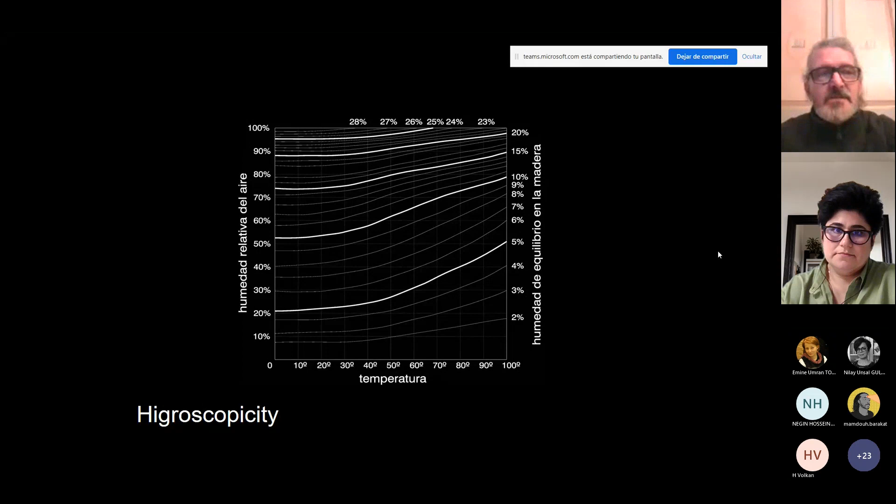So we need to know that wood is a material which is different to others in a series of concepts, such as hygroscopicity, which is the property of wood of getting moisture from the air around, or the contrary, giving that moisture to the air around, depending on the humidity and the temperature of the place in which that wood is. So it doesn't behave as metal, it doesn't behave as concrete, it doesn't behave as stone. It has its own properties.

Another one is anisotropy. Its properties are different in the three axes in which we can organize any cut of the wood: longitudinal, radial, and tangential. That's the reason why when it shrinks, because it's getting dry, it cracks. And it always cracks in radial direction because the tension is double in tangential than in radial. That's one of the consequences of its anisotropy.

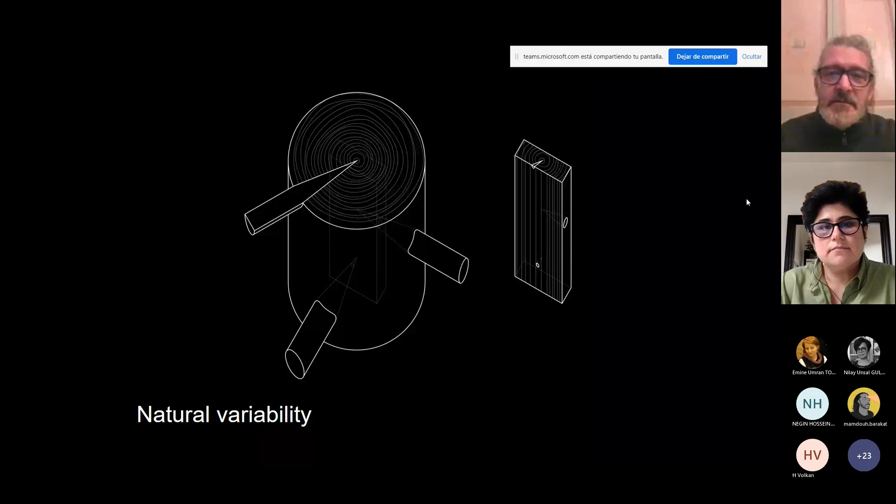Another one is natural variability, and natural variability is due to many things. One of them is the species of wood. There are thousands of commercial species of wood, and each one has different properties. So the anisotropy is different, the shrinkage coefficient is different in each species. But also, where you see those horizontal elements which have been drawn here, those are branches. Branches mean discontinuity of wood.

So if we take a plank out of this trunk, we see it on the right side, you can see that we cut those branches, which are always radial, and they involve a discontinuity in the grain of wood. So they reduce the structural properties of that element. The bigger the knot is, the lesser the structural properties of this wood are.

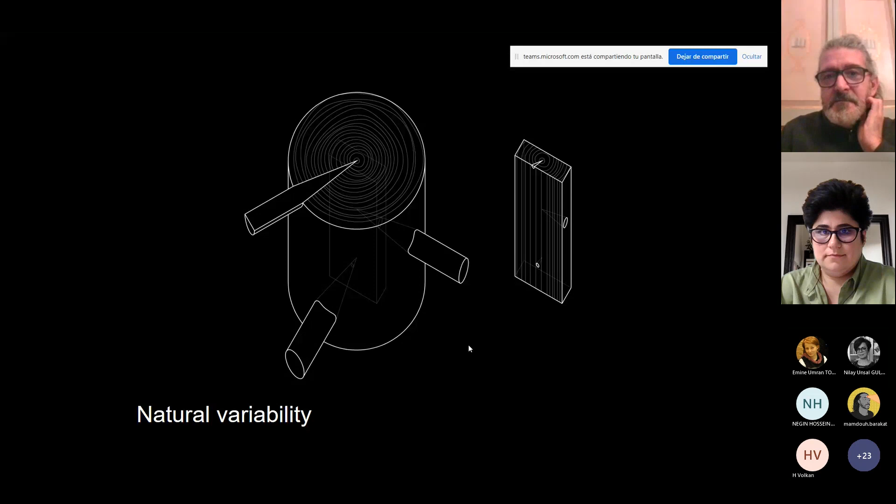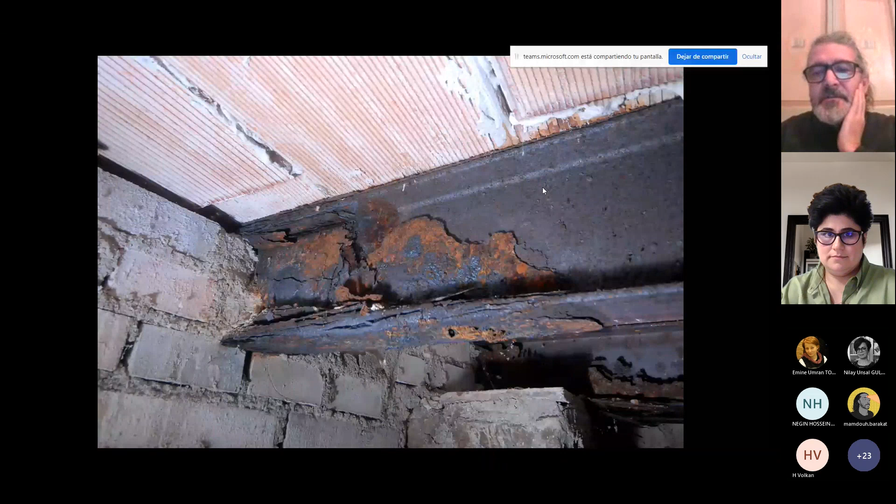So yes, there's an issue with durability, but to say that wood is not durable is not as simple as that. We can see a metallic beam which is on the way of being destroyed by corrosion due to moisture also. So moisture is an issue also for metal, and you can get to this extreme where the metallic beams, in 100 years of use, have been completely destroyed because of moisture.

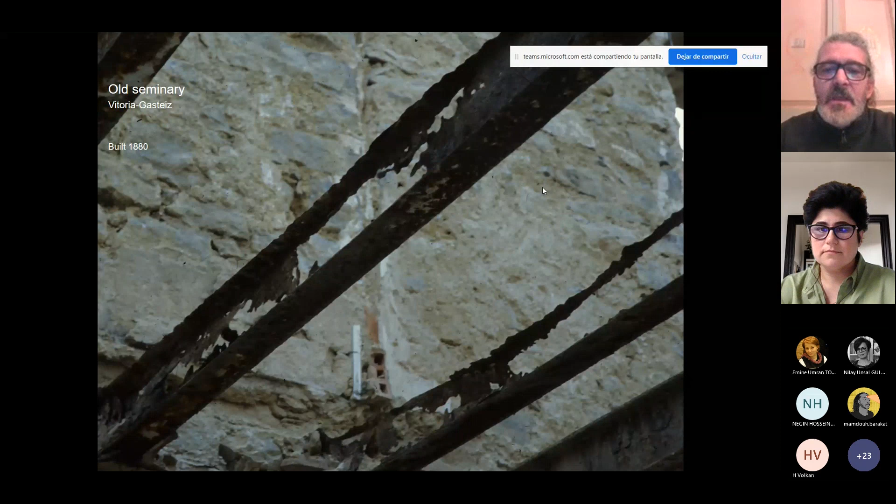Which is why, for instance, the French need to do constant maintenance of the Tour Eiffel in Paris, because if not, it would have the problems we've seen in the former images. So it needs maintenance, and they do it, and that's why the Tour Eiffel is still there and will still be there for many, many years.

This is a restoration work we did in 2016 very close to Bilbao, on the coast, in a very industrial, coastal and exposed situation, in which the owner, an industrial man with a lot of money, probably told the carpenter, put me the best wood you can here. And it was teak.

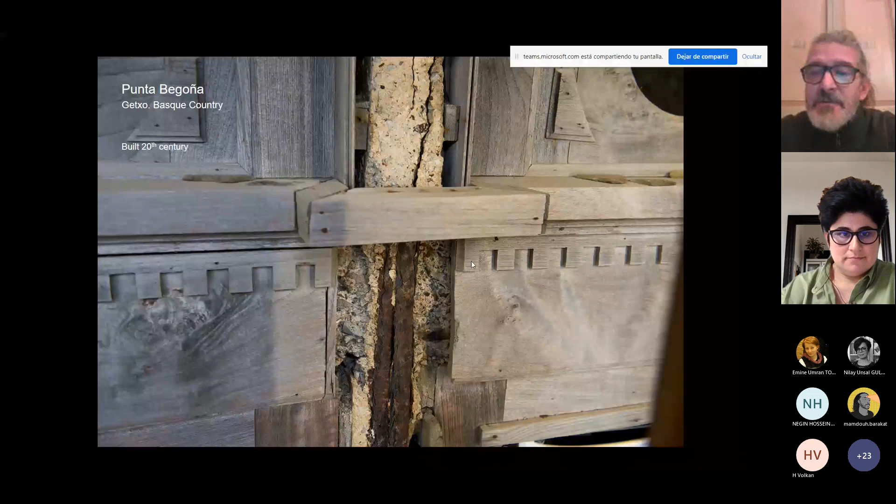But we also know that there are buildings such as the Urnes Stavkirke in Norway that was built in the 12th century and still standing. Obviously, they maintain it. They care for the building. They've been caring for the building for so long. So that's the reason why it's still standing. So durability is linked to maintenance and to the care of the people that are managing, using the building.

And the case of the Horyuji in Japan, which is a 5-story pagoda in the old capital of Japan, which was Nara. It was built in 670, which is, well, a long while ago, and it's still standing. This building and the former one in Urnes are World Heritage, both of them.

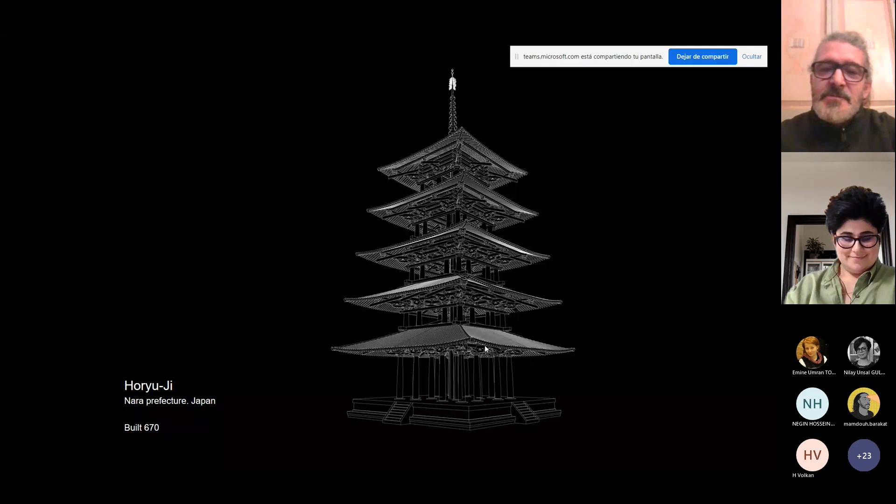Impregnability. This is a very relevant property of wood when speaking of heritage, because from time to time we need to protect wood, and we protect it with chemicals, and those chemicals need to get into the wood. So if the wood is not impregnable, you cannot protect it with chemicals. If it's impregnable, then you can protect it. This concept of impregnability is very related with durability.

If you have, as the image we saw before, the teak, which is a very durable wood, it doesn't matter whether it's impregnable or not, because you won't treat it. It makes no sense treating it. But if you have pine, some kind of pine, then you need it to be impregnable so that you can protect it if the use will be outside or in any place where moisture can access the piece of wood.

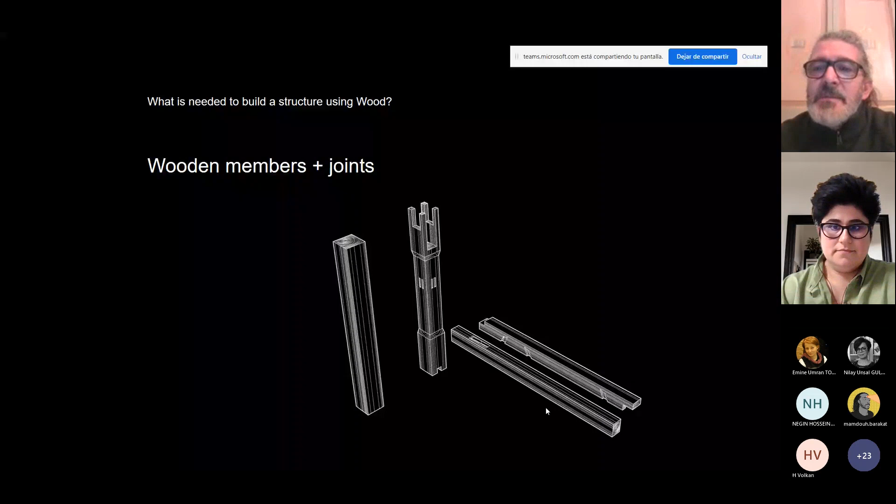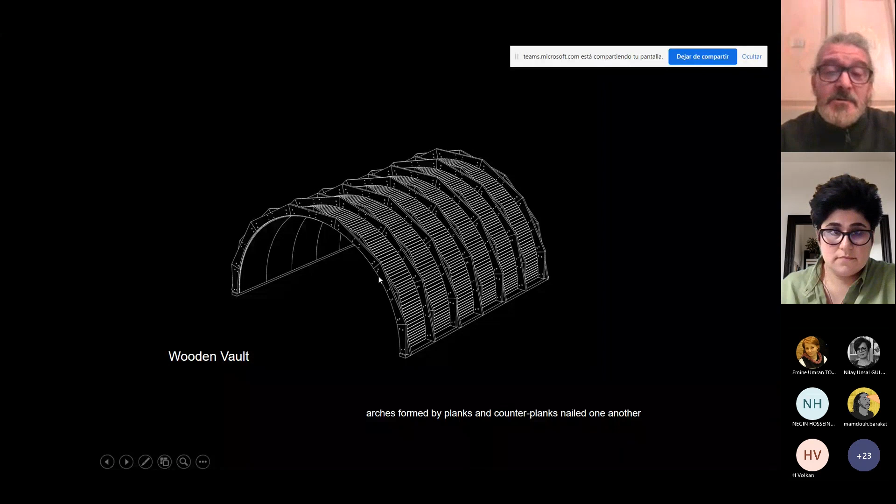And here you have more complex vaults made of planks and counter planks that are nailed to one another, and you can see the nails and the limits of the planks, because you always get a plank from a tree, and a tree is usually straight, so you cannot do the complete arc with a single element. You need different elements. So this double arch system that was used for centuries is quite an efficient and interesting one, and you can see it in the Cathedral of Lima and other buildings in Europe and in South America.

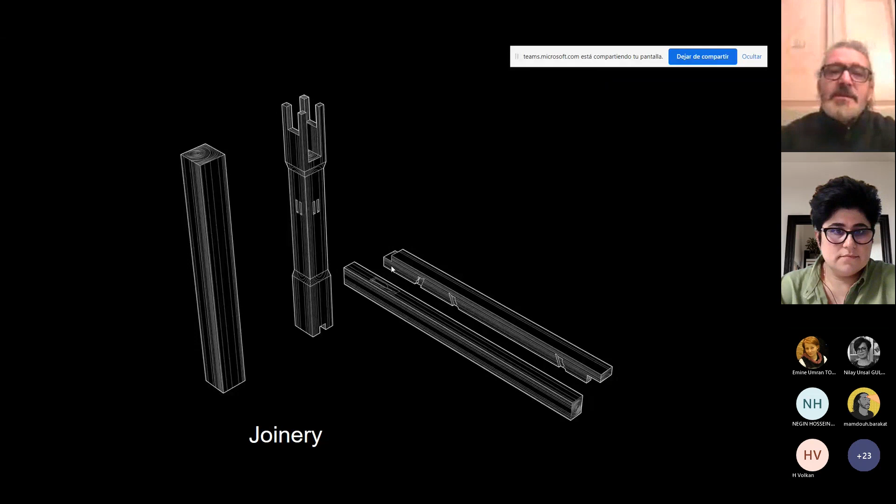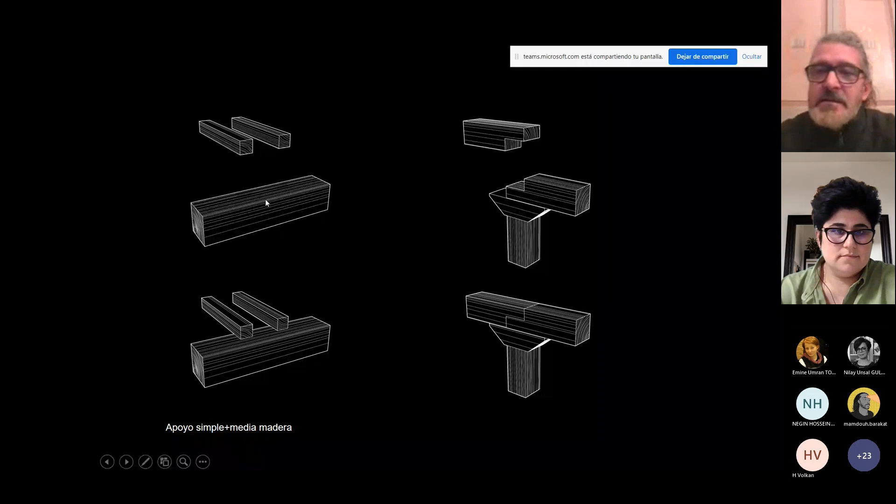Another way of joining is joinery, traditional joinery. That would be the third one. We've spoken about knots, about nails, and this is joinery. This is the most typical, or the most recognizable for wood, which can be as simple as a simple support with this joist just put on top of the beam, and that's it. It's as simple as that, or a half joint. But with those two joints, you can make this building, except the roof. All the rest is made with those simple ways of joining.

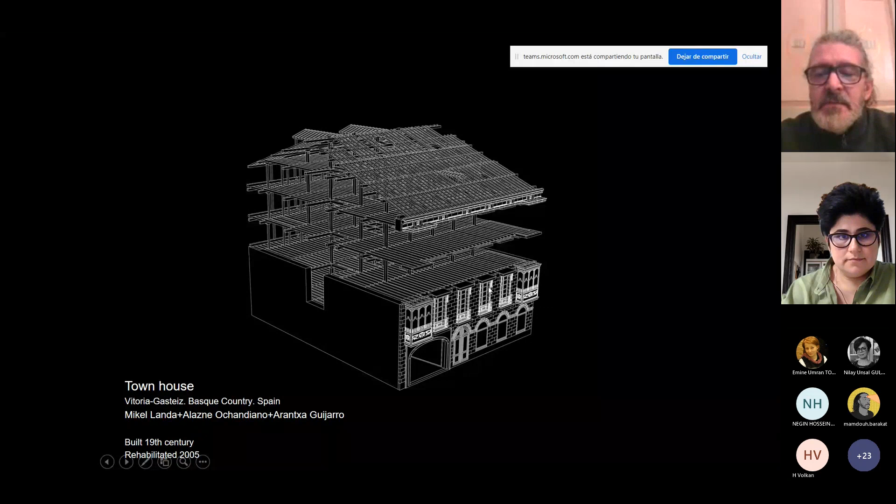This is a typical stone facade in the center of any Spanish city, but it can be also Italian or French or from so many places. And inside of it, everything's wooden: the pillars, the beams, the joists, and the roofs.

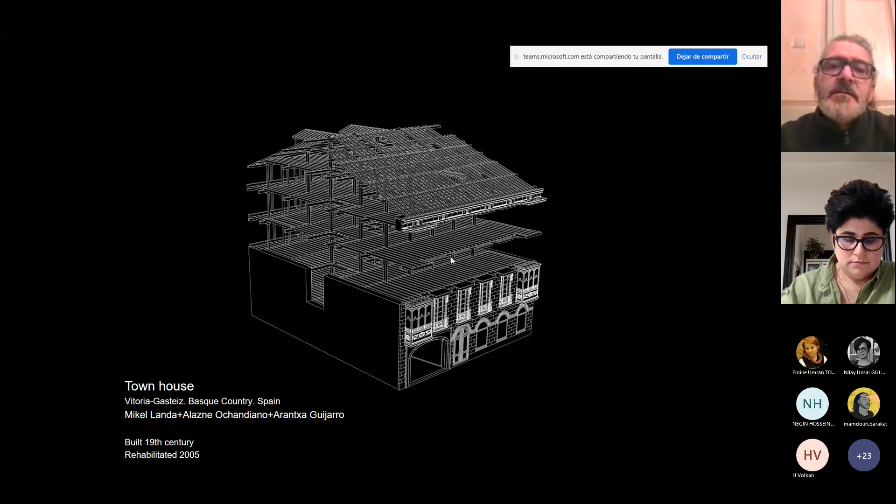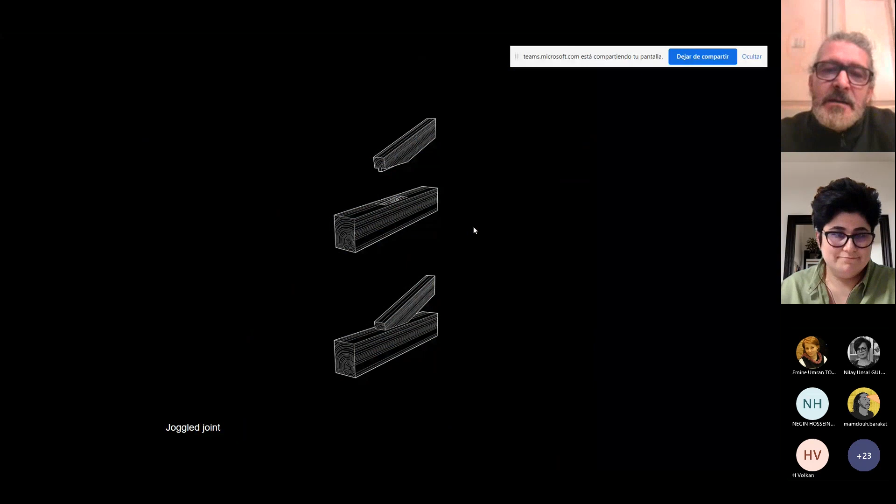Joggled joint. When you get an angle you can have a truss like this one, in which, when putting one and a few meters later the other, and then the other, you can make a roof. And a roof that works quite well because it only transmits vertical efforts to the walls, to the stone walls. So the structure is quite interesting.

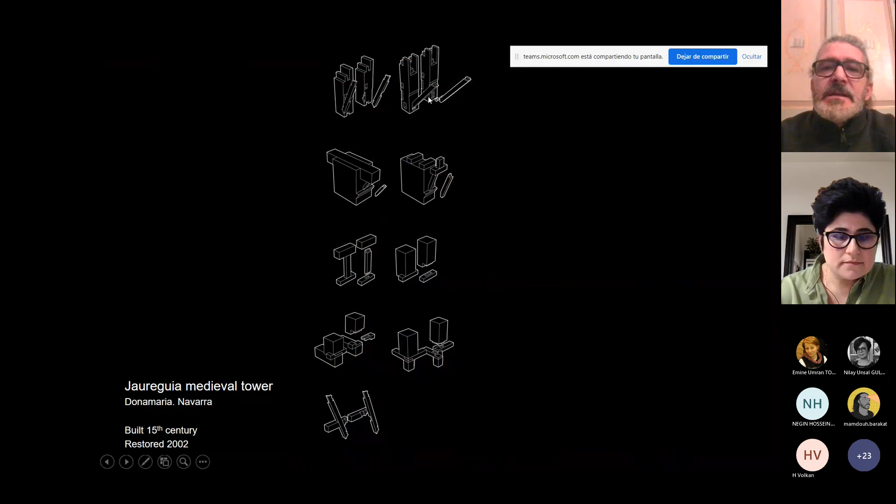This is a medieval tower in the north of Navarra, built in the 15th century, restored in 2002 by a teacher of mine in the university, Maite, and she did an extraordinary job in restoring this. But the building is an extraordinary example of how to use wooden joinery. What is each kind of joint for? And they've been used with a very precise idea of what they needed as a structural function for every element.

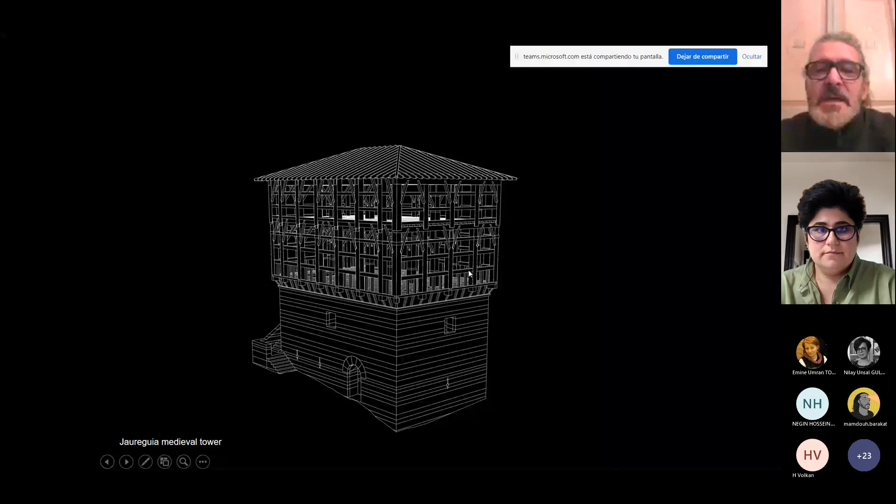So this is the structure, 2 stories made of stone with the inside made of wood, and the 2 upper stories are completely made of wood. And this is a consequence of a war which was lost, and then the winner, which was Spain, said, okay, you will cut all your towers, and the upper part will be made of wood. So the consequence of a war gives us, centuries after, an amazing heritage, and this is it, seen from outside.

This one is not that new because glulam, we've been using it for 100 years, but with small elements you make big beams, and then with those big beams you can do amazing structures that you obviously can't think of. Many of them you've seen or you've loved. LVL, laminated veneer lumber, which is a kind of very thin layered glulam, which is structurally more efficient and uses wood in a better way, or CLT, cross-laminated timber, with which you can do big constructions, and it's used for many purposes today. It's very popular, at least in Spain, but in many other countries also.

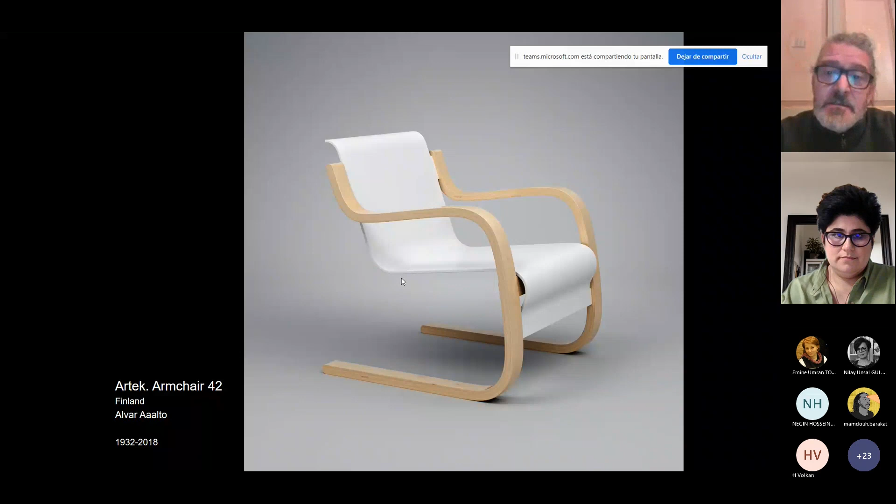But imagine, you all know this chair that Alvar Aalto did, not 100, but 90 years ago, which is quite a lot. And it also was quite innovative at the time, but it's the properties of wood with glue that make this chair possible. And that's it. And I would say it's comfortable.

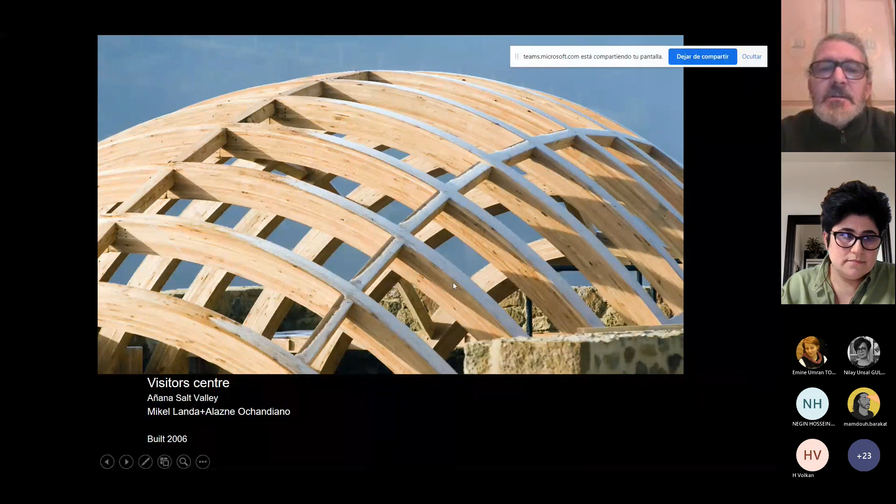But it also gives us the opportunity, together with those CNC milling machines, to do amazing structures like this one. We did that a few years ago in Añana, in the Salt Valley of Añana, and it's an ellipsoid made of glulam, and this is the shape of it.

So it gives so many possibilities in new construction, but also when speaking about conservation. What we're doing today, the techniques, the way of focusing how to work with wood, is specific to the material, specific to the culture, specific to the building you have in front of you when you have to restore something. So wooden heritage gives the possibility of doing so many different buildings, so many different structures, that the heritage itself is very diverse, and the conservation processes are also diverse.

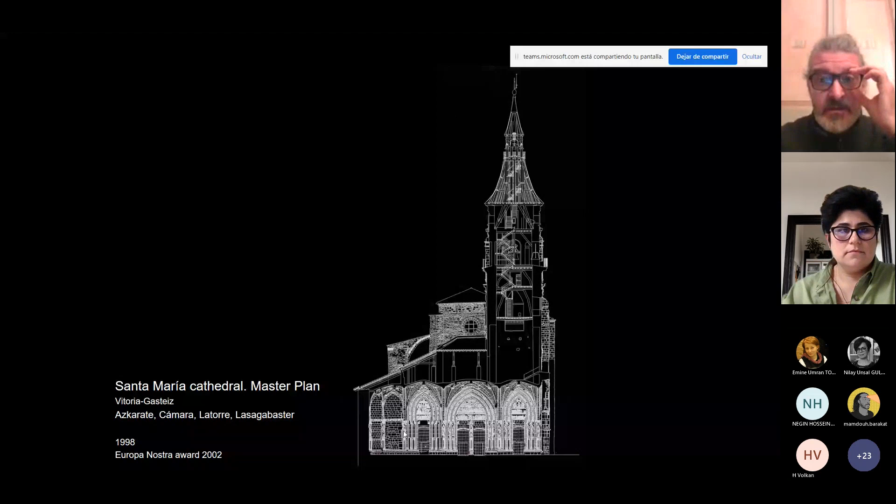So in this case, in 1998, the Cathedral of Vitoria, of Santa Maria, during the master plan, this was done with pairs of photographs, which is called photogrammetry, and then all the stones, woods, and corners of the building were drawn on computer with accuracy. It takes time, but depending on the building, it's worth it.

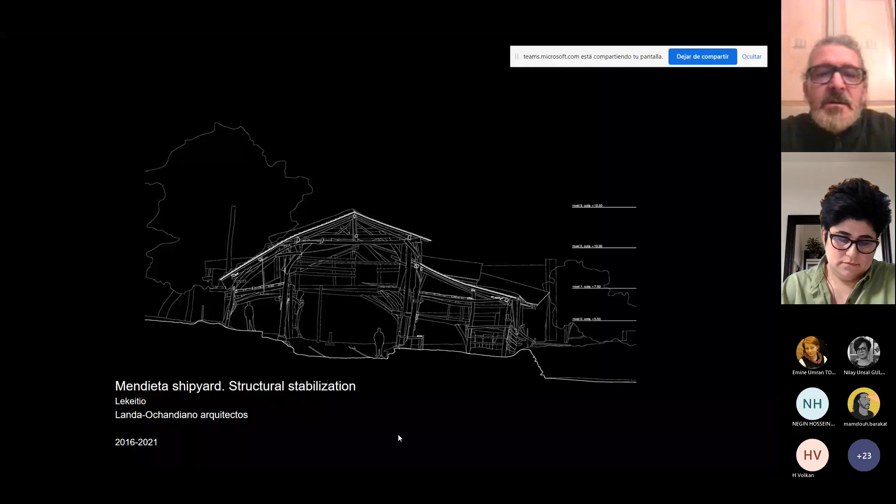But we used this for another amazing project we're actually doing located on the Basque Coast, which is a shipyard, and which is completely deformed in every direction. So you cannot, well, you can, yes, but it's difficult to do it in the traditional way. So what we did is a laser scan, and with a point cloud in the computer, then we draw it piece by piece, element by element, each one of them in the exact position, dimension, and in relation with the others it has in reality.

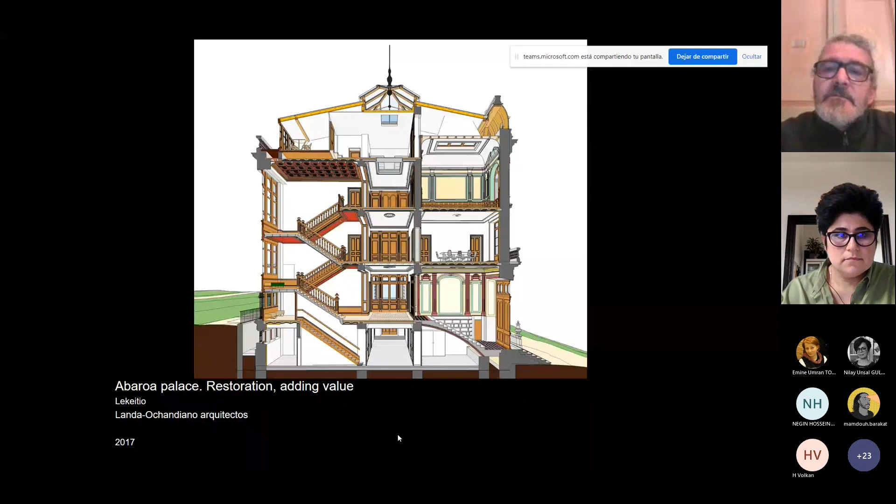But you can also use BIM, I mean Revit or any other kind of software that works in BIM, which is the one we use here for the Abaroa Palace, which is also on the Basque coast. This is it. This is a view from the outside of the building, and then with the proposal for new buildings, also made of wood.

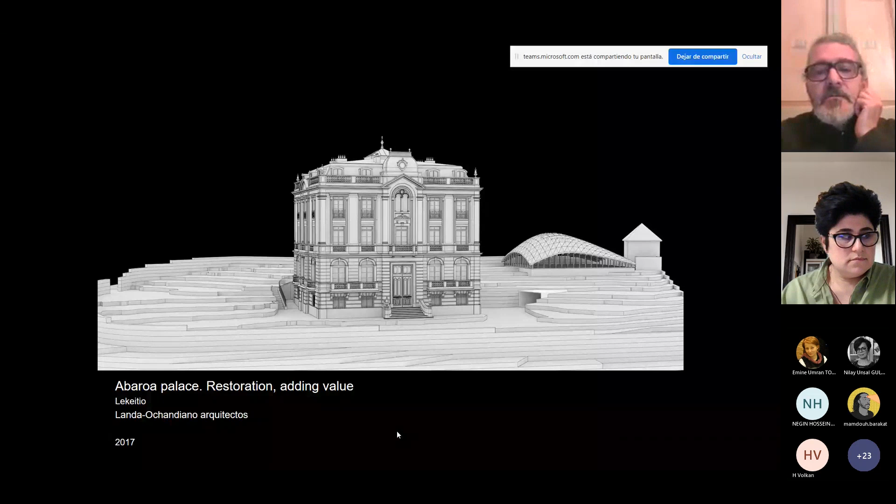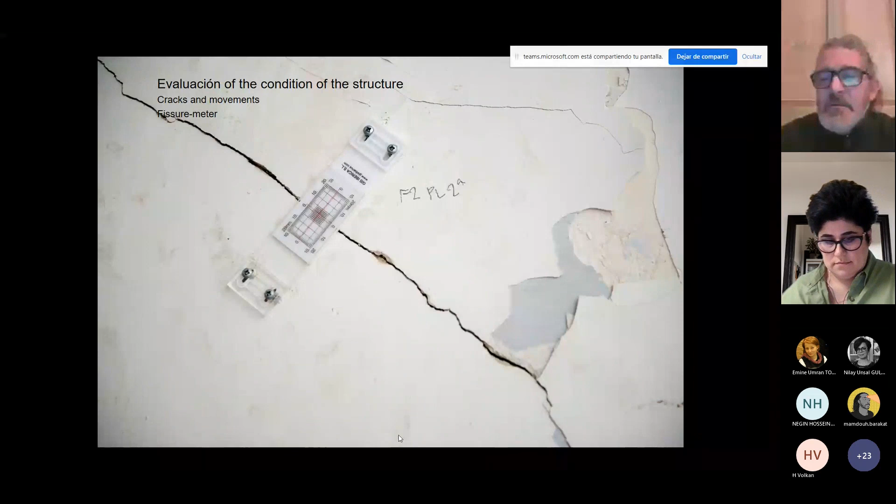Obviously, you need a diagnosis of what the condition of the wood in the building is, and for that you can track every data that is relevant for the wooden structure. It can be also the cracks, following how the cracks are evolving, whether they are evolving or not, and at which speed they are evolving, and in which parts of the building they are still, not moving, or in which of them they are moving. So that's quite relevant to know if the building is still sagging or leaning or whatever.

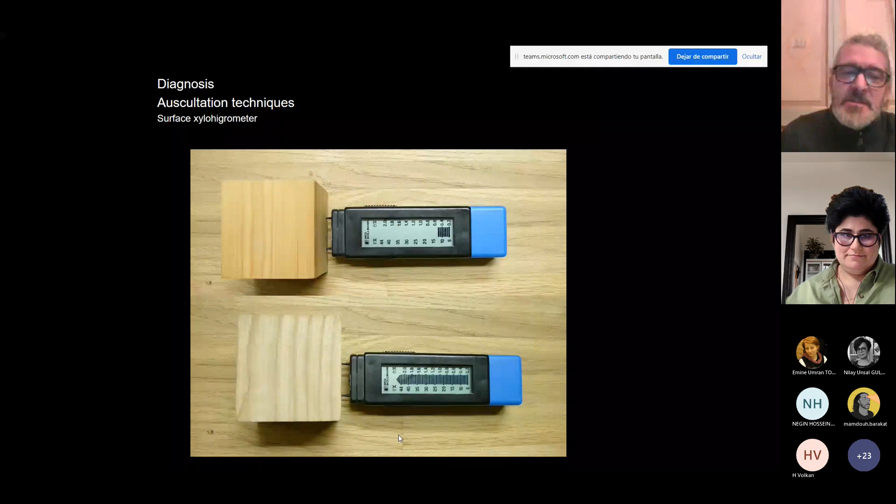Measuring the moisture content of wood to know whether the wood in the upper one is 12%, and in the lower one is more than 44%. Those are samples in the office, obviously, but if those were on site it would mean that the one on the upper side of the image is correct in terms of moisture, and the one below has a problem. And yeah, that gives information that can be relevant.

But also some, I would say, more modern auscultation techniques like the resistograph, which is like a drill. It's a very thin drill that gets into the wood, so it's not completely innocuous. It makes a very small hole in the wood, but sometimes you need that hole to realize whether there's an issue, whether there's a structural problem or not inside the wood.

It gives a lot of information, and all that information of any kind of method that you're using, any kind of different measurement you're doing, you can put it into a drawing and then display it in a way that it can be understood quickly as well.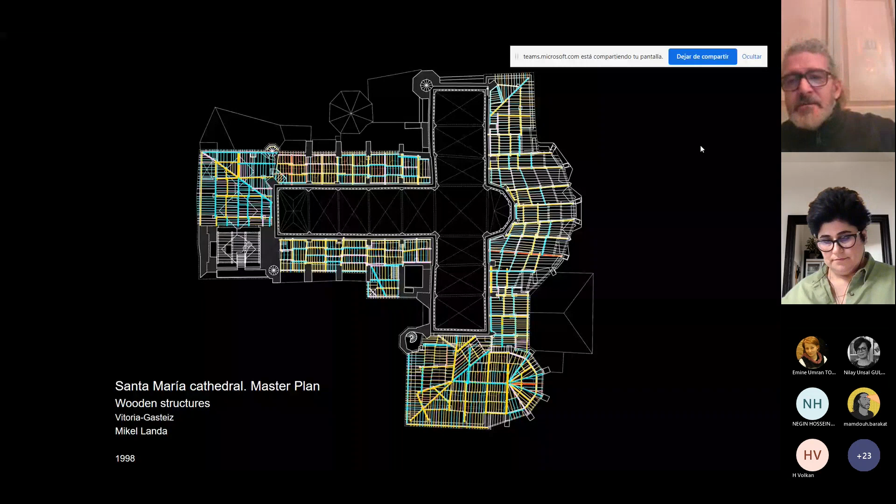And then you can go even further and give a kind of structural qualification, whether each one of the elements is still appropriate for structural use or not. And then after all that information, you can decide in a better way than without that information, and we go forward.

So techniques, there are many, but I usually like to concentrate on those that carpenters have been using for centuries. You know that a wooden structure is usually more isostatic; it's not like a concrete structure in which you have rigid joints. For having this upper left structure working, you need to put a diagonal on it so that it doesn't deform.

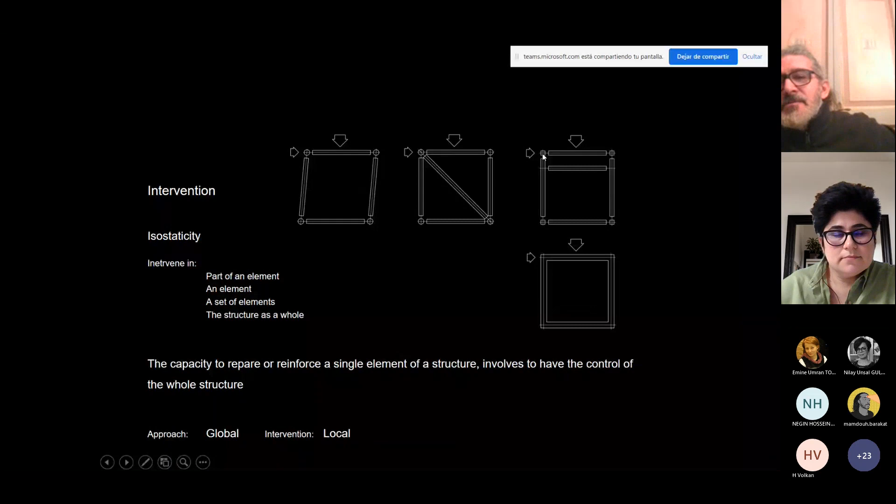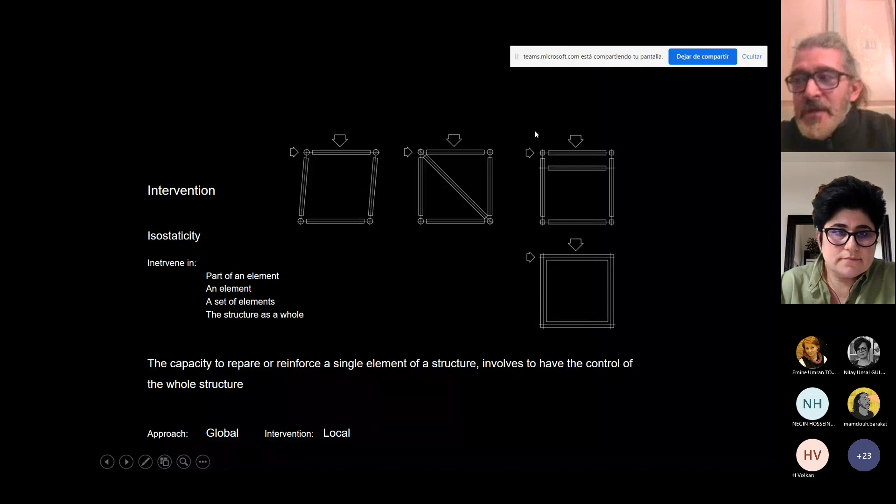The Japanese and the Asians, they do it by repetition of elements, vertical, horizontal elements with knots that are much more sophisticated than ours. That's why I drew them with a square instead of a circle. Some of those Japanese knots have a certain capacity of absorbing moments, flector moments. So if you repeat them in a certain number, then you have an approximately rigid structure, which is fantastic for earthquakes. They work well with earthquakes.

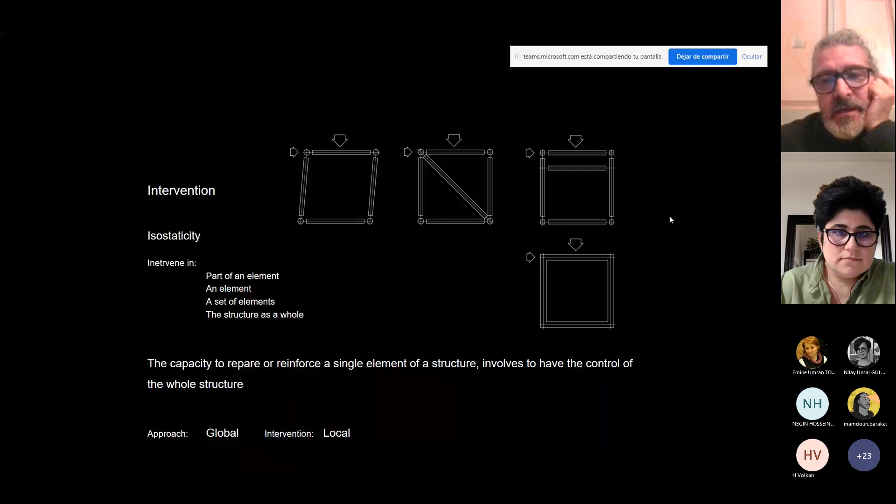But also, I go backwards to this one. The fact of being isostatic means that if you intervene in one part of an element or on an element, then you're able to control the whole building. If you are able to repair one single element, whether it is bending or compression or tension or whatever, then you're able to restore the whole building.

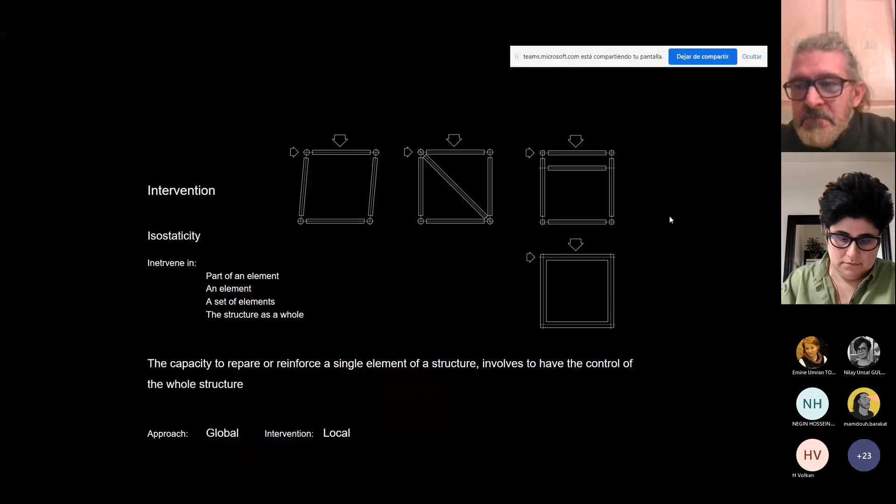So the approach is global, obviously, but the intervention can be local. You can restore, repair, reinforce, or whatever you have to do to one single element, and you're doing something which is appropriate for the building.

And this is the kind of repair that carpenters have been using for centuries in so many countries, which is a graft. We could call a graft a repair or reinforcement carried out in a wooden structural element by the only use of wood and joining both parts. When I say both parts, I mean the element you're repairing and the new one that you are giving for the repair. So joining both parts with joinery, fasteners, glue, or a combination of them.

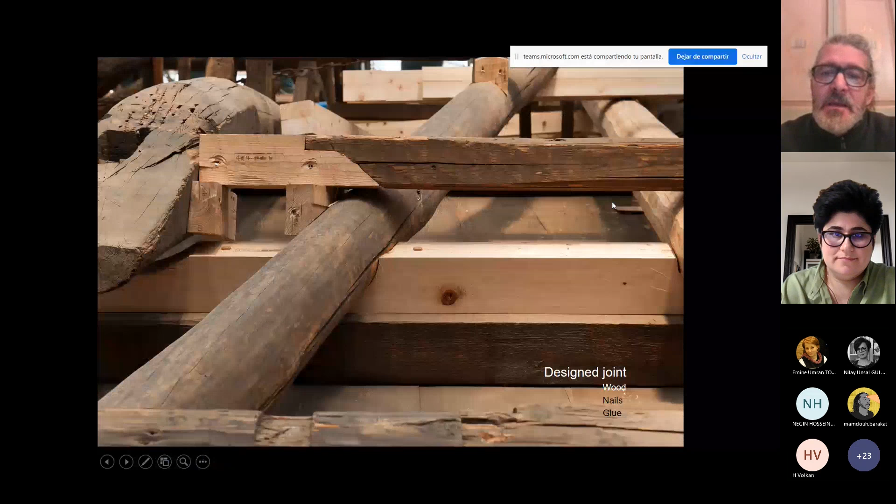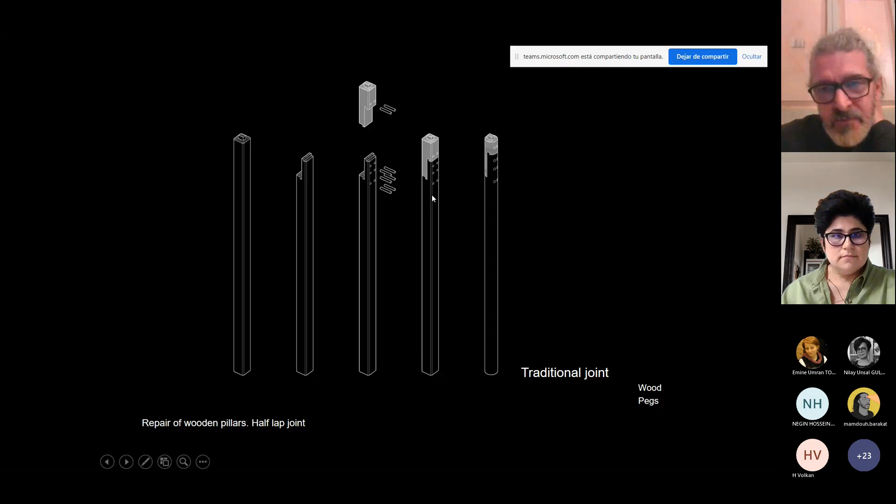Well, a graft in the top of a pillar which could have damage, and with a simple joint, then you can only replace a small part of the pillar, and then you have the pillar which is structurally efficient, as it was before at the beginning when it was placed in the building, or different ways of joining which are more complicated, made in this case by the Japanese.

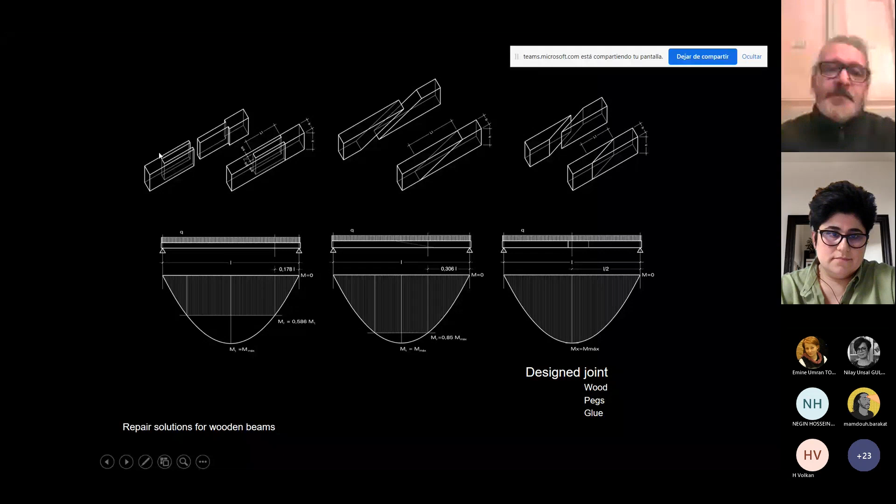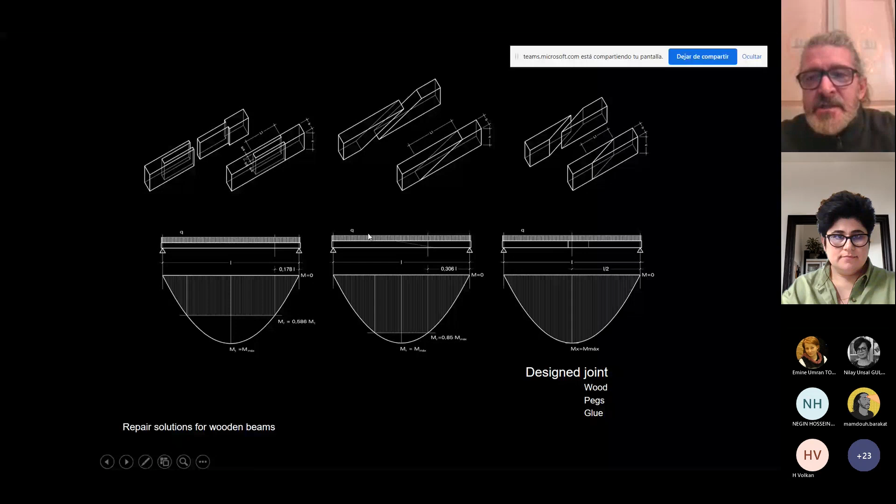So structural grafts are a more modern, I would say, way of joining, even if the design is simple and traditional, because they are traditional ways of joining, but as they are glued, the behavior is different. So then you can control the amount of structural efficiency you recover in every element. So depending on the design, you can use it in different places of the same beam, because it's more or less efficient. In this case, the more you go to the right, the more efficient the solution is.

Sorry, and forwards. And then we can see a few examples, or maybe just one, of what a graft is. This is in the Condestable Palace in Pamplona, which was restored in 2006, 2007. And I will show just one case because we have 1 hour. We've started a bit late, but I would like to keep to time.

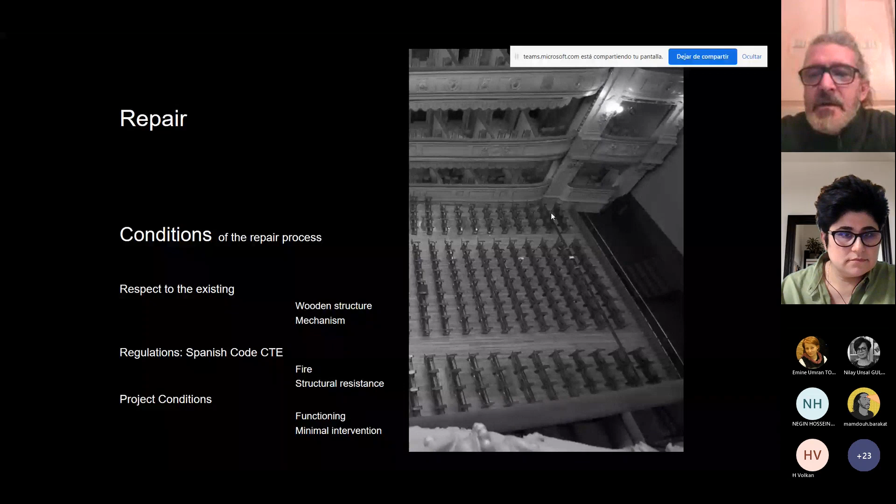I will put this example, which is a theater in Asturias, on the north coast of Spain. The building was built at the beginning of the 20th century. And it has something quite peculiar. When you see it, you see a normal small theater of any city in Spain. But it has something very special, which is that if you take those seats out, then you can put this surface horizontal.

Below the seating platform, you have a wooden mechanism that helps make the movement, so you can have it inclined, so it can be used as a theater, or you can have it horizontal, and then you can use it for any purpose, like an encounter, or dancing, or an exhibition of photography, or whatever you can imagine. And you have a rotation axis, which is this one on the left, a hinge.

So the municipality called us because there were certain pathologies, and they said, okay, can you analyze what the pathologies are and what the intervention should be? We saw that the pathologies were quite severe in certain places of the structure. The first thing we needed to do was get in, see the structure, and try to understand how it worked, because it was not easy at the beginning. You see wooden pillars and diagonals and elements in every direction, and say, "Oh my God, how does this work?" So first is understanding, and the second one is drawing.

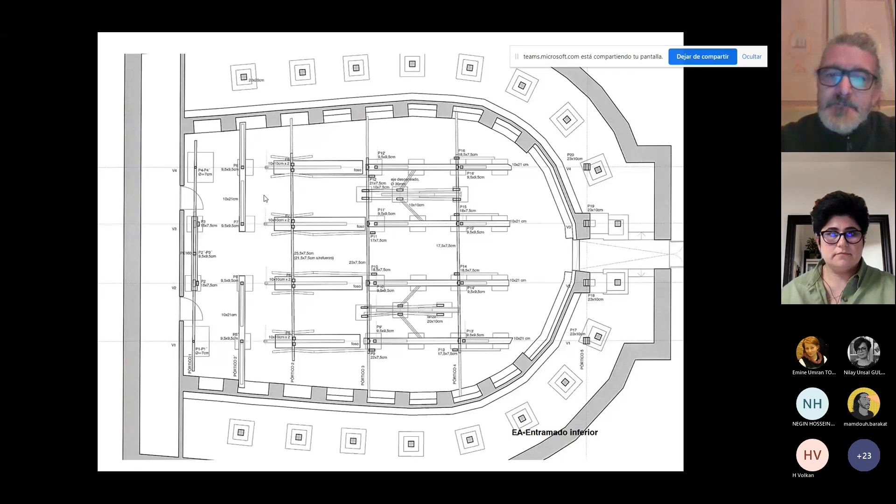On top of that, you can see a floor made of 4 beams. The beams are triple, so it's 3 pine beams put one beside the other. So we have 4 beams and many joists. It's quite simple, but very thin elements, because if you have to move it, you need it to be light. So you cannot use big, thick, square elements. They have to be thin, quite lightweight.

So the difference between this image and this other one is the position of the pillars. You can see that the pillar here, P7, is in one position where the structure is up, and in a different position where the structure is down.

So that means you have to calculate the structure not only once, but more than once. You have to calculate it in the lower position, with the pillars and the distances between pillars that are in that position. And then you have to calculate it again when it's in the upper position, because the distances are completely different. Some of them are completely different, and you have to make it work in both situations.

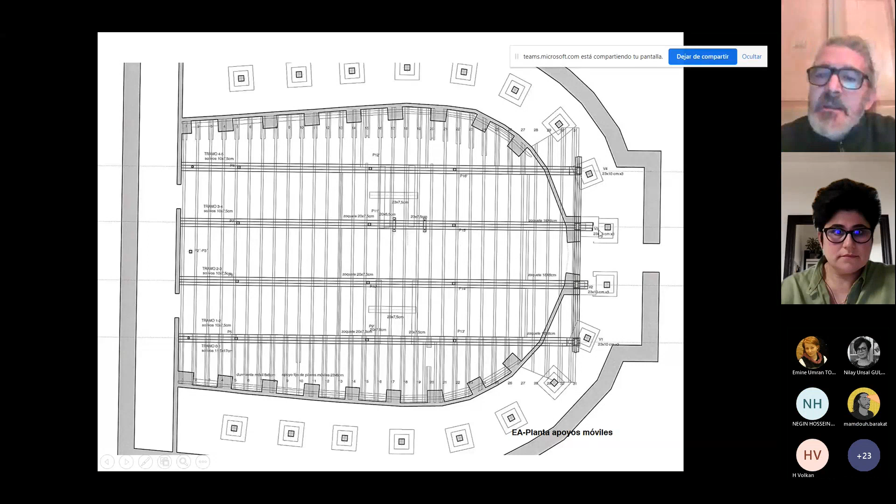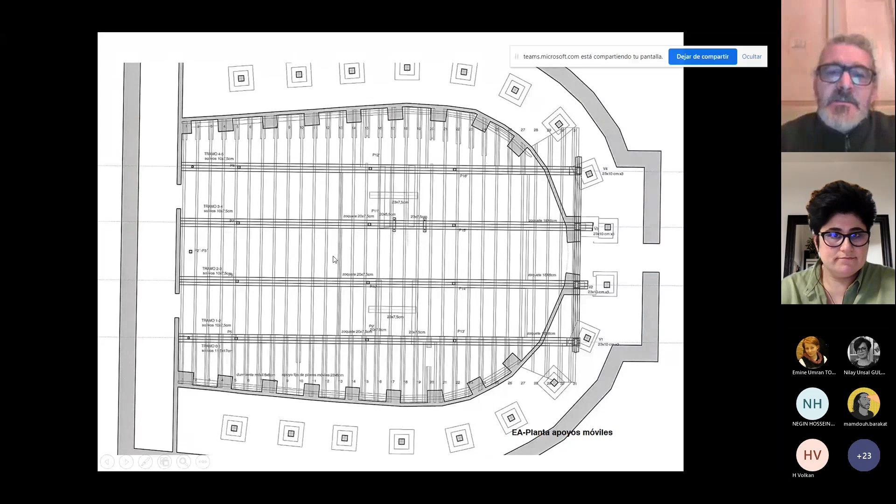But then there's a third one, which is when it's moving, because when it's moving, you only have the support of one extreme, and on the other extreme there are no pillars. The pillars are not touching the structure while it's moving. So you don't have the use load, because when it's moving, you have no one on top of the structure, not even the chairs. But the distance between supports is huge. And once you did three calculations, then you need to do the diagnosis of it.

So what we saw when we got in is that the structure was painted red, because someone thought years ago that it would be nice to have it red, but there's no sense, no interest in having it red. What for? One, because it's out of vision. It's a structure which is hidden, it's not seen. The second is that the painting is hiding the pathologies. So you don't see them.

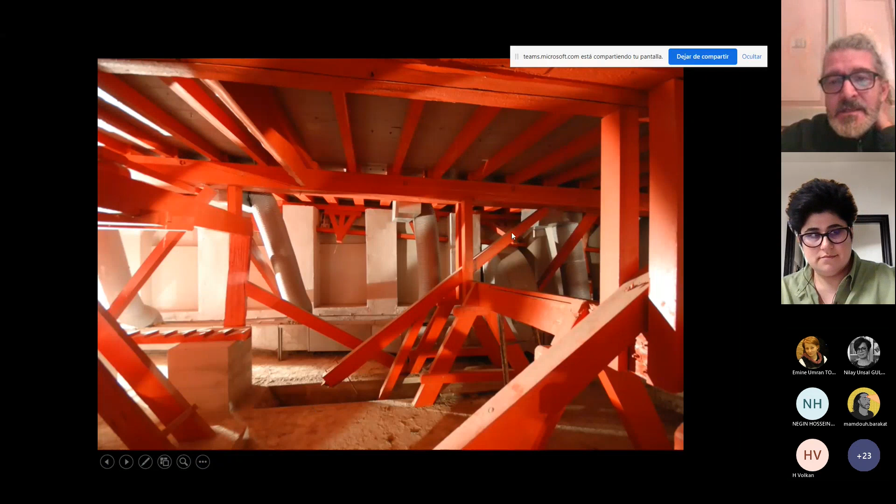You see a nice structure, you don't see the pathologies, but we see one here on the lower right side of it, which is the broken beam. And you can see here this cantilever where something's missing. And then you can see that this pillar is not vertical, and it's not vertical because of the fungi where it meets the concrete, because it was put into the concrete, so it was completely destroyed at this place. And once it was destroyed, this diagonal was pushed to the left side, so it took it out of its place. So yes, there were a number of pathologies.

And then you can see this pillar, which is the pillar when the structure is in the lower position. And this pillar, which is inclined, and when the structure goes up, it gets to a vertical position with this rack, or I don't know what it's called. So you put it vertical, and then you have the structure in the upper position with this pillar, which is supporting nothing in that position. So those are some of the pathologies.

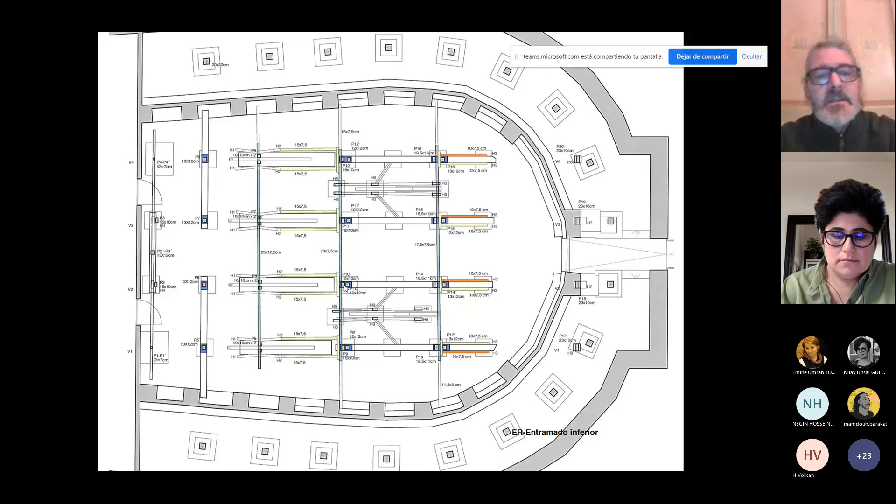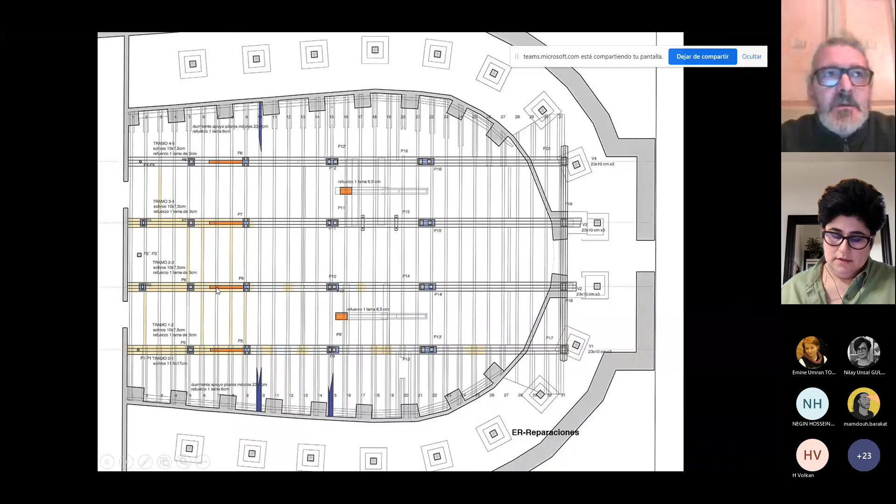So the project just proposed a few interventions. You can see here in colors the few elements that were repaired or reinforced, and in this blue, those are sacrificial wooden elements that we will see better in the images afterwards, or the repair of the beams due to side effects. And this element here is also a sacrificial wooden piece for the wheel, and you will see it now in the image.

So those are repairs of the main beams, which are made of pine. They repair the graft and the beam itself, because if the beam were made of a different species of wood, then we would use that species for the repair. And those parts are glued so that the structural efficiency is, I would say, complete, total.

And in this case, those joists were reinforced because there's the technical code in Spain that you have to follow. And in this kind of building, there's sometimes a difficulty in keeping to every aspect of those technical codes. So this is an example of trying to comply with every detail of the code, but it's simply impossible. You cannot do everything. You have to get as close as you can, but in some cases it would mean changing the whole structure. So what we did here is we put a limitation on the use, on the use surcharge, and that's it.

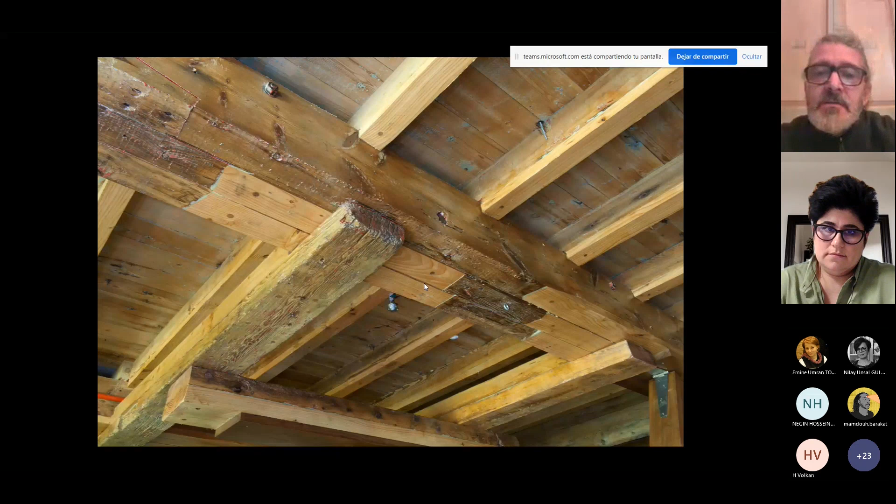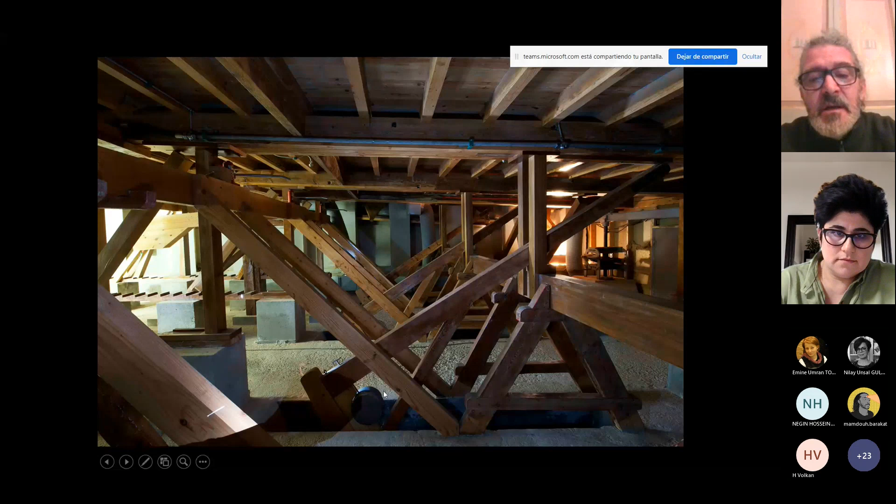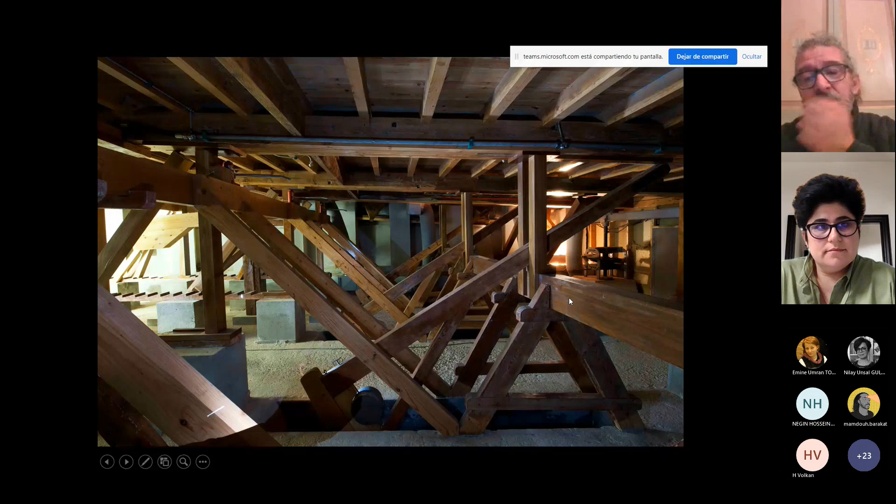That's what you can do. You see the structure here finished with those elements that were recovered, or reconstructed I would say, because those are new concrete elements that were placed because none of them remained. And this is the beam as you saw before, broken in several places. We changed it with a different species due to fire, to improve the response of this structure in case of fire.

We didn't get to 100% accomplishment of the norm, but that's the reason why we put some sprinklers that would activate in case of fire, so that the fire is finished. And this is the only time we've used products to improve the response of wood in case of fire, but those are products that give a different color to the wood. It separates them from the air, so the wood doesn't breathe anymore. And it only gives you 15 minutes, which sometimes is enough for saving lives, but it's the only time we've used this kind of products here, intumescent products.

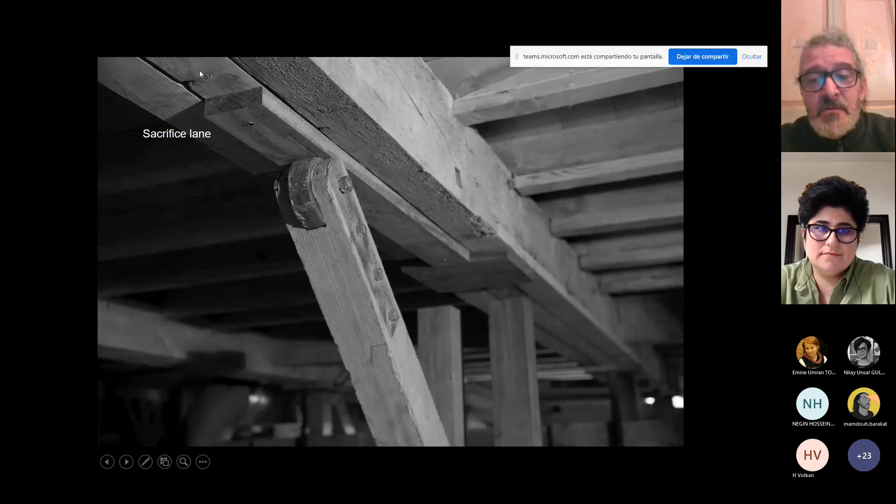And this is the kind of wooden sacrifice element. In this case, it is a hardwood with, you can see, a screw here and another screw there to protect the original wood from the wheel, because moving this structure means that this wheel will go backwards and forwards, and then it will damage the original wood, and it was damaged. So we put a sacrifice wood, and if it's damaged in the future because it's been used many times, which I hope will happen, then it's a question of changing this small piece of wood, but not needing to repair the beam itself.